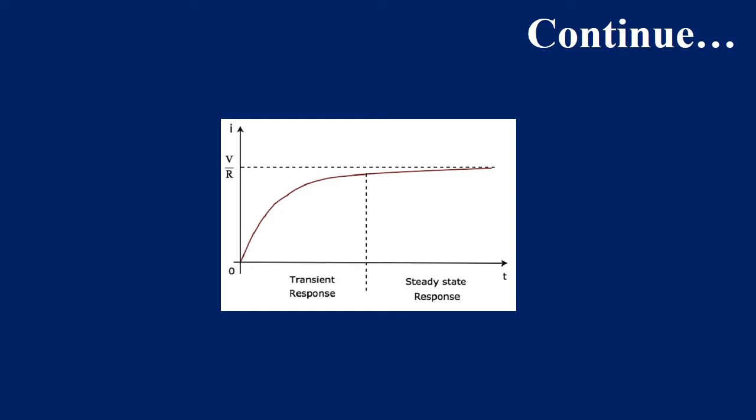Furthermore, ETAP transient stability leverages detailed and validated equipment and protection characteristics, control models, and user-friendly graphical user-defined modeling together with advanced algorithms to perform analysis for industrial to transmission power systems.

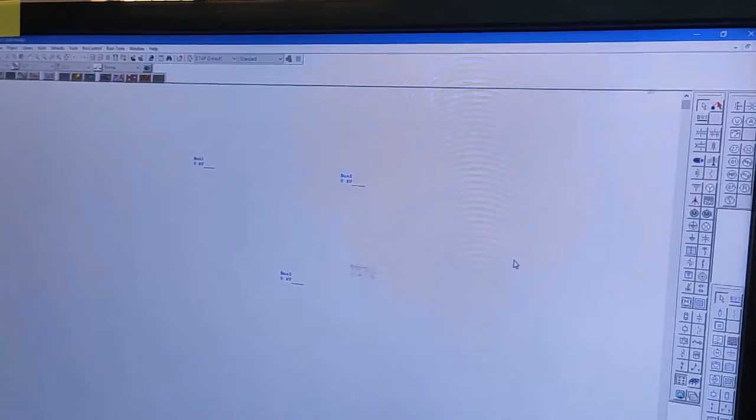This is the edit window, and first we have to create the single line diagram. And for this, this is the bus. Okay, here. So just click on this and drop it here. And for this transmission line, we have to select this impedance. And don't click on this transmission line. Okay. And for connection, just touch on this.

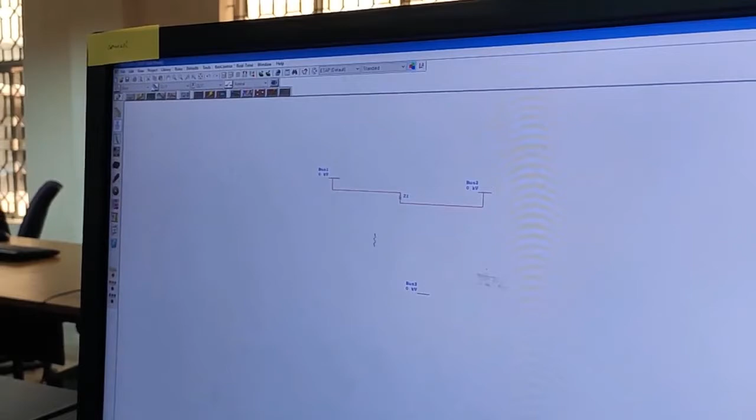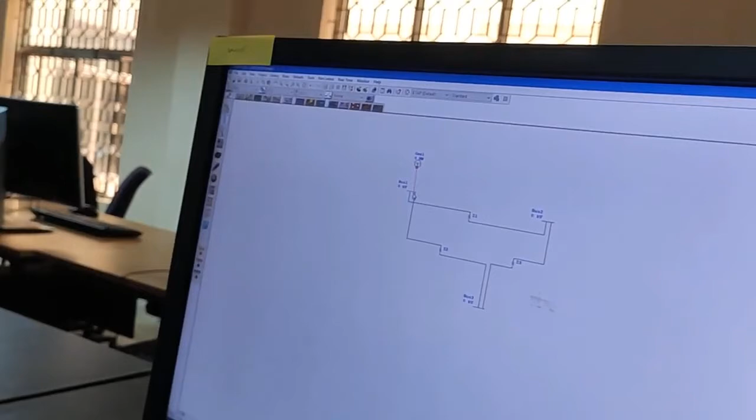This is the generator. This one is the generator. And 2-3 loads are there. Loads must be constant power loads, they are giving. So you must take static loads.

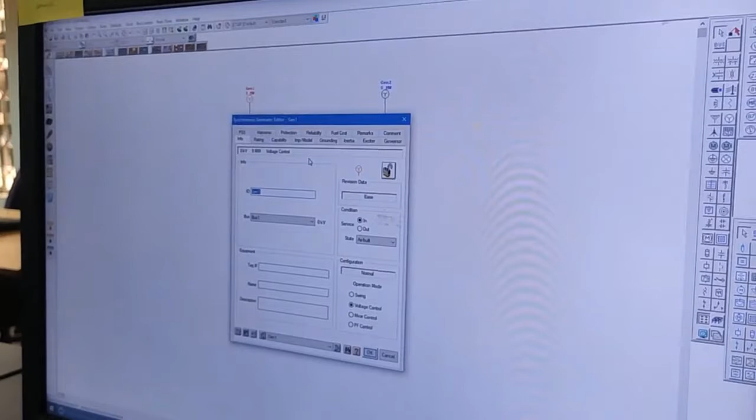Now to give the values for generator 1, one generator must be set as swing bus. So first, generator is selected as swing, and we go to the rating and give the MVA value, which will be specified in the question: 10 MVA and 11 kV.

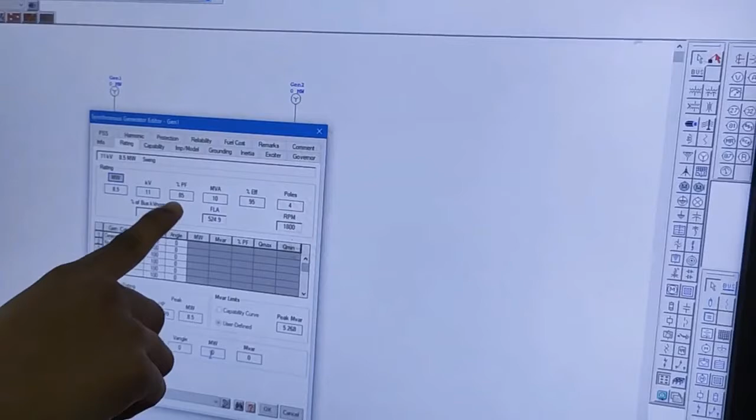Here also give the values like percentage voltage must be 100%, and MW rating will be calculated. Power factor will be default here. Take the MW rating as 8.5, and the MVAR they have to calculate, which will be like 5.26 or something.

And for the impedance model, we have to load the data for the generator. So click on this typical data, it will load the values. And for inertia, it will be given in the question, so give H as 5 and click OK.

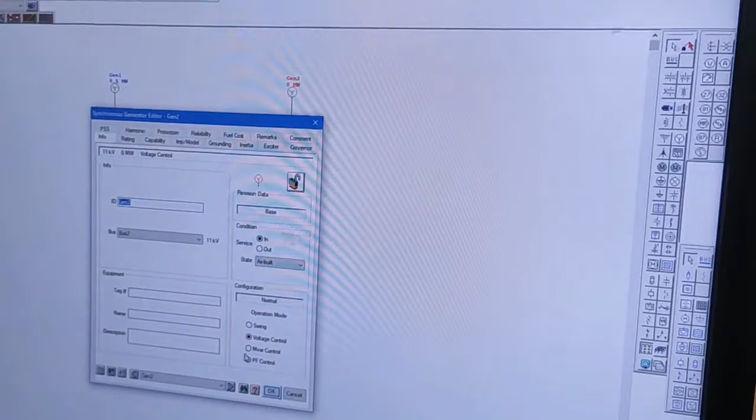Now for the next generator also, this must be voltage control, only one must be swing. Go to this rating and give the MVA 10, 11 kV, and here give 100.

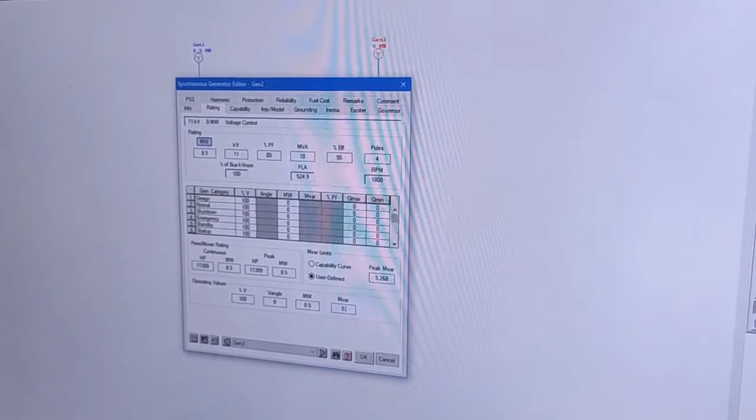And the load values are given. This is the first load, and that value will be given like 4 plus 3j, that is P plus JQ. P is 4 and MVAR is 3.

Then it will automatically calculate the MVA. Here operating load also you must give the same, 4 plus J3. That is it for the load.

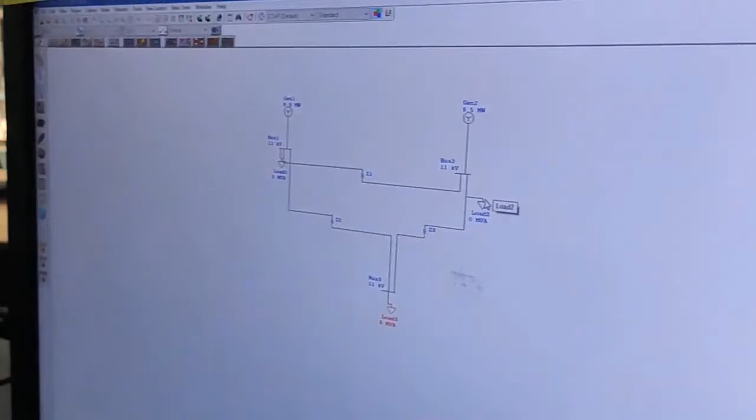Next is load 2. In the same way we have to give the 3 loads: 2 plus...

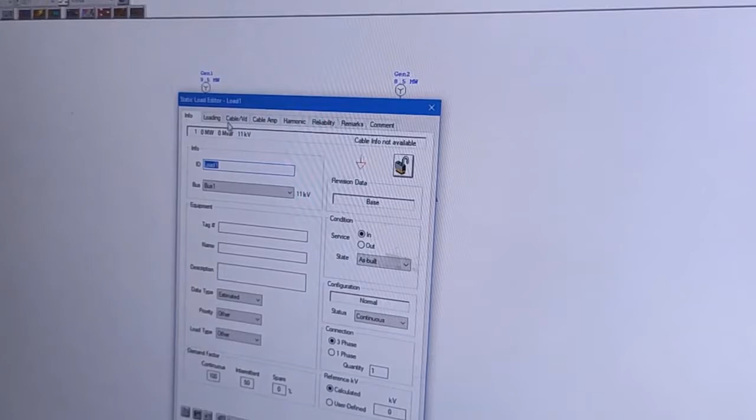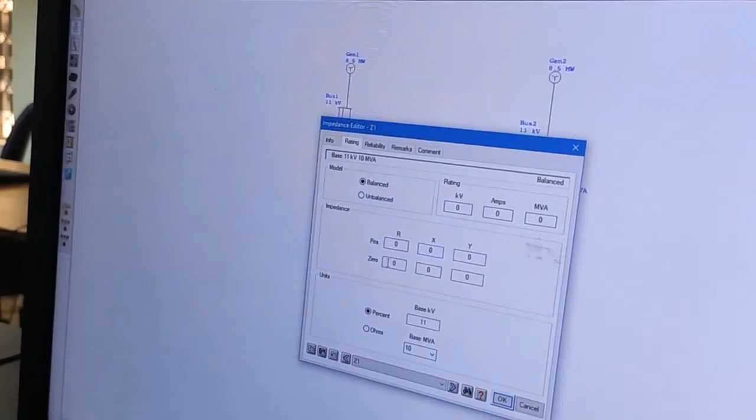For the impedances, select the impedances and go to the rating. These 10J, 15J will be in per units, so take this percentage, don't take ohms, and give the base kV and base MVA. Base kV will be 11 and base MVA will be 10. And give this as 10J. X only is to be given, R is not there.

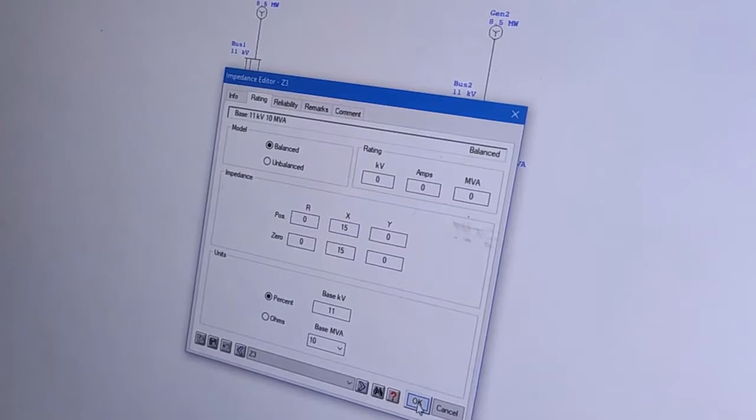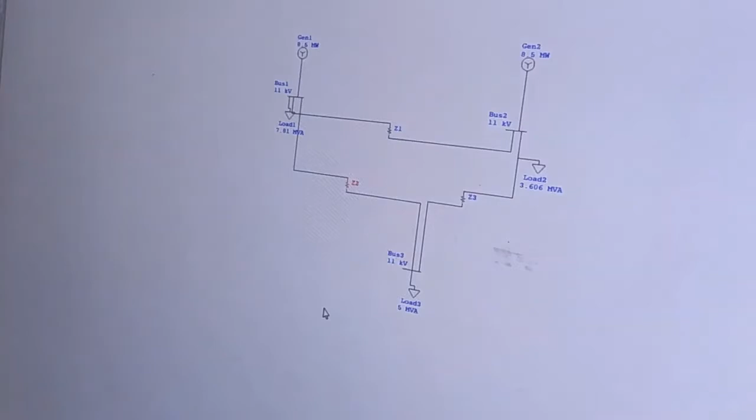This is given, and all the values are given now. Click on the transient analysis button, so a study case will be activated, and go to edit study case.

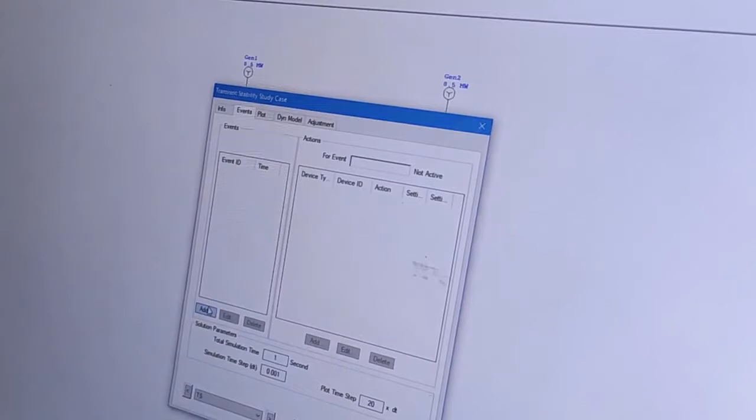We have to create a fault now at bus 3. For that, go to events and click on add and create a fault. Fault is created at 1 second. So to add the fault event at bus 3, click on add, and this fault will come.

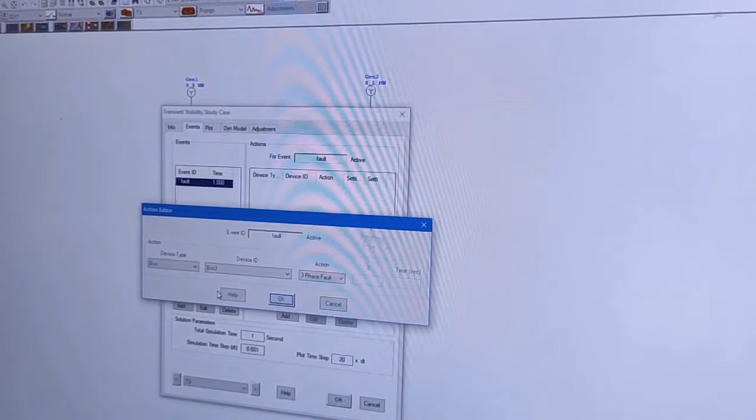For this we have to select bus 3, as given in the question. So select bus 3, and action will be like 3-phase fault. Click on OK. And another event must be added to clear the fault.

A clear action is added, and the fault must be cleared at 1.05. Before, if the fault is not cleared within 5 cycles, the system will go to instability. 1 cycle means 20 milliseconds, so 5 cycles means 0.1. Before 5 cycles means we have to give like 0.05.

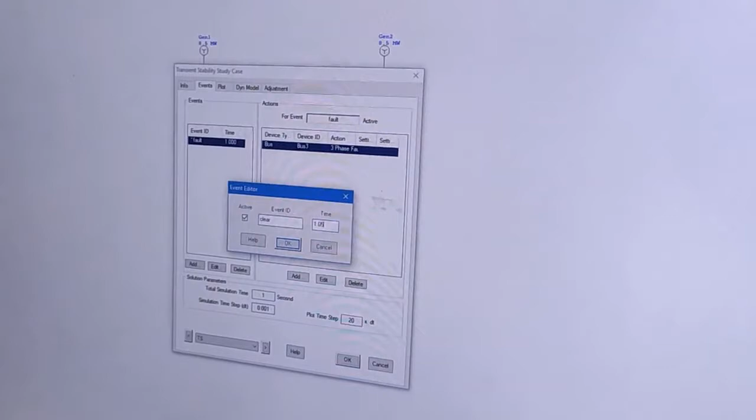That is given in the question. So 1.05 is given, and again click on add, and in bus 3 add the clear fault event. This is added, and give the total simulation time like 50 seconds.

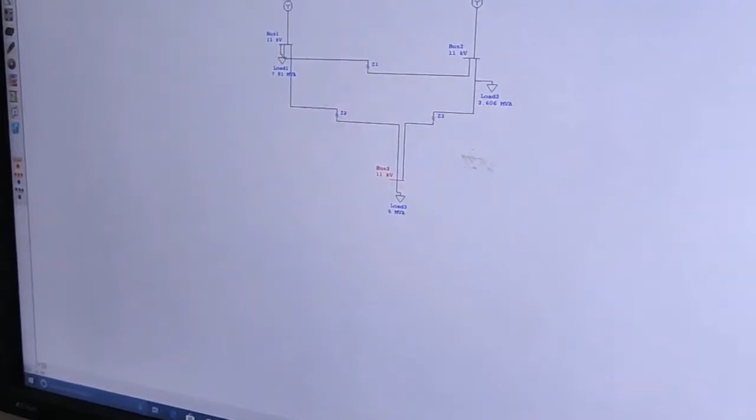And take again edit study case and go to plots, and we have to select both the generators. Both generators' responses will be plotted. Click on OK, and this is the run button here, this green button.

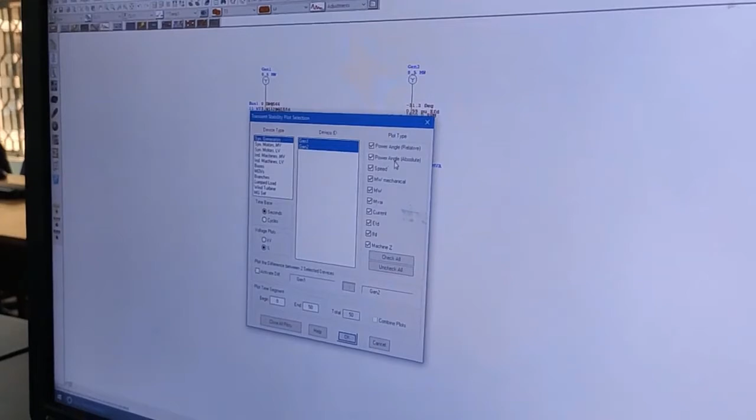This will be running now. This is run, and go to this plot option, this bar graph, and click on this and select the 2 generators. These all graphs will be plotted, all that is ticked.

Each graph, they have to take the printouts. Each graph.

And also we have to, after doing this, go to events and terminated... what happened? Crashed.

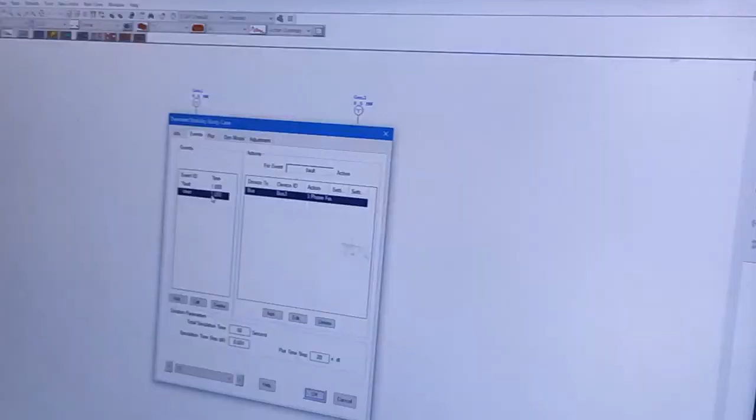Add the clear time like, after doing this is a stable case, add 1.5 seconds, that will be the unstable case. 1.05 and 1.5, both they have to do as separate events.

You took from this side? No, this one, edit study case. Oh, edit study case, there events and plots are there.

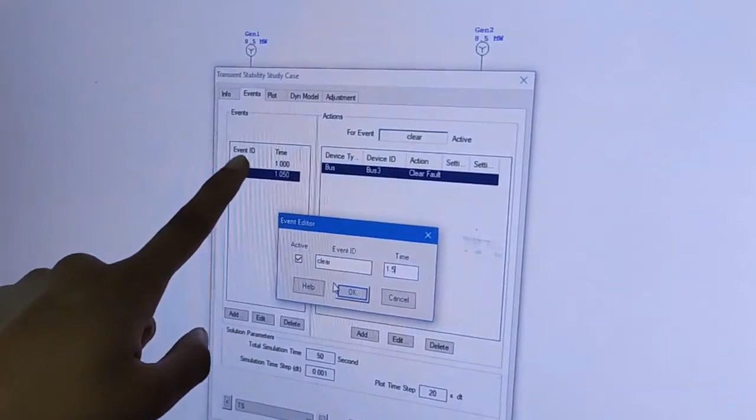In events you have to add fault and clear. For the stable case, the clear time will be 1.05, and for the unstable case it will be 1.5. Both have to be simulated, stable and unstable case.

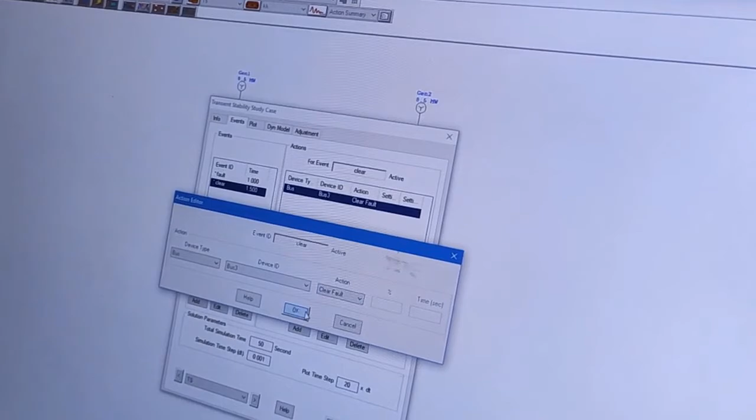And this is added, and this is the clear fault being added.

You clicked the first one? First one. Okay, then click on this plot option.

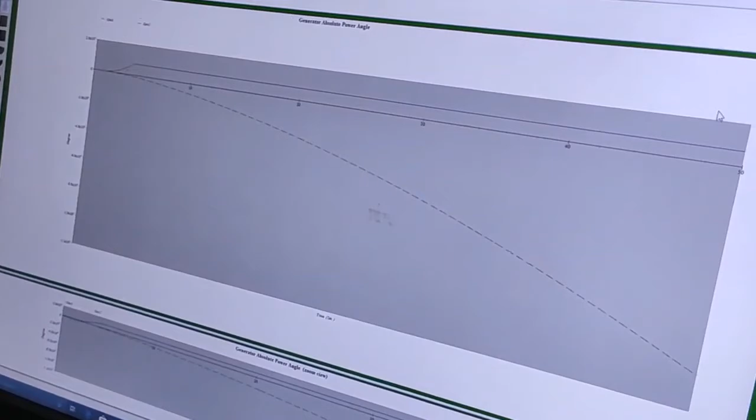Yeah, okay, transient stability plots. Select both channels. It will be like floating. This is the unstable case.

So first you are creating a fault, and clearing it. First, fault and clear, both events must be added. For fault and cleared fault, both events we are taking figures. That's it, and this is the transient stability analysis.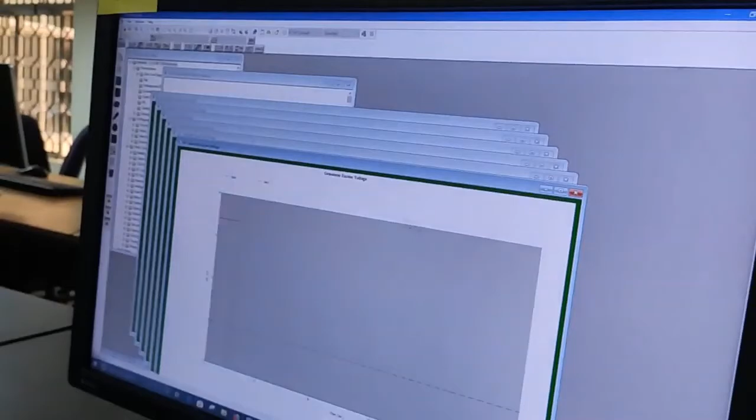And one more is there, that load flow. No, wait, this is finished. One is finished, right? I'll save it.

From this experiment, we have learned about the transient stability analysis in ETAP software. So this is our introductory lab of the electrification and energy auditing subject. This is all from my side.